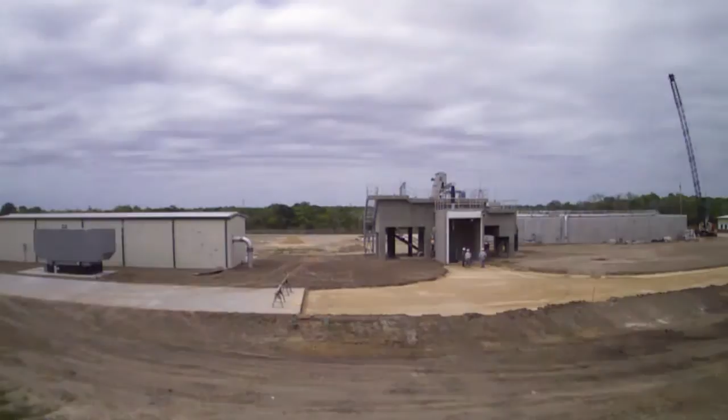Welcome everybody this morning to our grand opening of our Odem Street Wastewater Treatment Facility.

This morning really is a culmination of a 12-year planning process that began in December of 2004. At about that time, flows from heavy rainfall triggered some regulatory requirements to begin planning for a new wastewater treatment facility. We haven't been building the facility for 12 years, but we have been planning it. It takes a lot of time to figure out what you're going to build, where, and how much it's going to cost, then moving into getting that put into our capital improvement program, getting funding, going through the permitting phase with the state regulatory agency, and finally getting into design and construction.

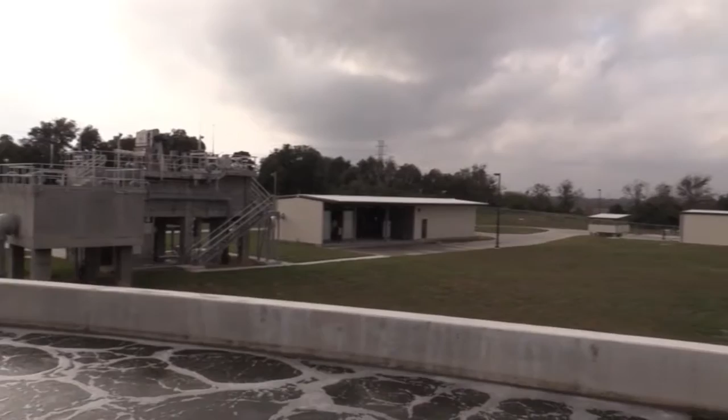It's been a very long time coming, but the result is this new state-of-the-art 4.4 million gallon per day treatment facility, which will serve the citizens of Victoria for many decades to come. In addition to adding new capacity to our system, this plant also replaces the old Willow Street wastewater treatment facility, which was a 1950s vintage trickling filter plant using very old antiquated technology. That has now been demolished - we're just finishing up the demo of that facility right now.

I want to take this opportunity to recognize and thank some of the contributors to making this day possible. Our Mayor Paul Polasek is here, Councilman Jeff Bauknight, Councilwoman Jan Scott, Councilman Rafael de la Garza, and Councilwoman Josephine Solis. Thank you very much for y'all's input into this. I'm going to ask the mayor to come up and say a few words, and then I have some other people after that I want to recognize. Mayor?

Thank you. I'm excited. And I'm not sure what that says though when you're excited about opening a wastewater treatment plant. I was joking with some of the engineers that I'm kind of an infrastructure geek, which I guess is rare, but to be on a municipal government, that helps, you know. Congratulations, Lynn, and all the department heads on getting this project done. That 12 or 14 years? 12 years. And you know, Mayor Armstrong, former Mayor Armstrong, was in the middle of all that, and there were a lot of votes and a lot of debate and a lot of discussion to get to this point. Most of it good, some of it a little controversial, but here we are today.

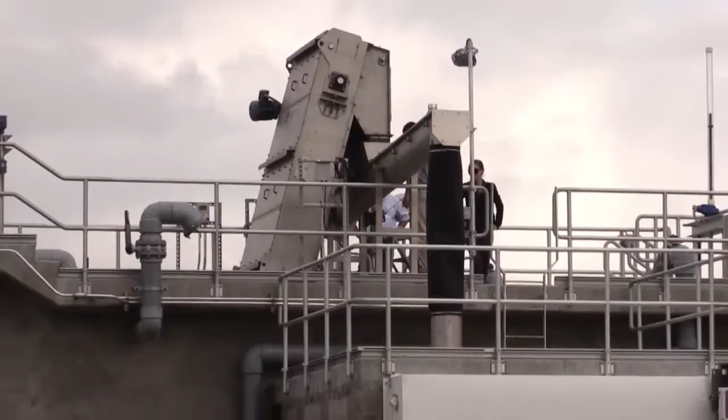We used odor control here because we want to be good neighbors to our citizens. Odor control in the form of chemical odor control at the lift station down on Southwest Ben Jordan. Here, we took some measures to control odor. We covered the headworks where most of the odor comes from. We installed odorous air blowers that exhaust the air from there and inject it underwater, used in the treatment process to prevent odors.

We used fine bubble diffusers so that we prevent off-gassing, or at least inhibit off-gassing. And then we used high-speed turbo blower technology here, because a big part of the cost of operating a sewer plant is generating air. So we wanted to be as energy efficient as possible. We used the latest technology in turbo blowers.

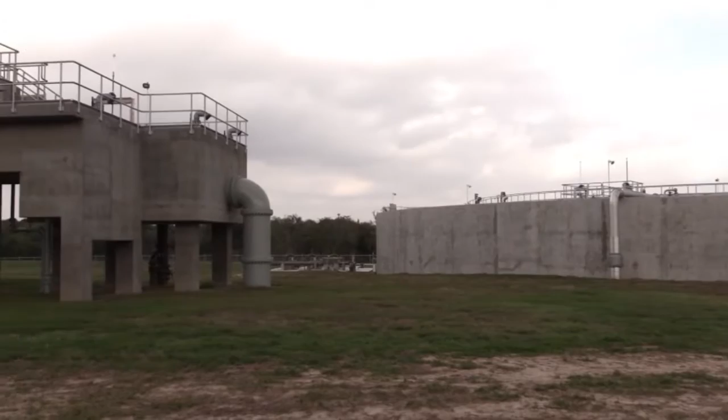We built an anoxic chamber in our aeration basin that you'll see when we're up there. Basically it allows for the proliferation of a good kind of bacteria that we want to make this process good.

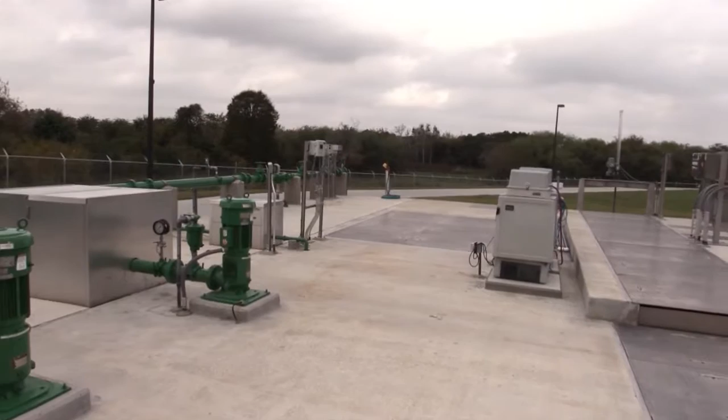We used ultraviolet disinfection because we use bacteria to consume waste in wastewater. At the end of the process, before we put it back in the river, we need to remove those bacteria. Most plants use chlorine for that. Chlorine is a toxic gas, susceptible to releases. Again, we wanted to be good neighbors, so we're not using chlorine. We are using ultraviolet light. It doesn't necessarily kill the bacteria, but it scrambles their DNA to where they can't reproduce, and then they die because they live a very short life cycle anyway.

And then finally, when you get up on top here in a minute, you'll see we use shared walls between these structures, which basically saves on concrete you got to pour, saves dollars. We were able to bring this plant online at about $3.60 per gallon of capacity, and that's pretty unusual. Most activated sludge plants today are costing around $5 a gallon of capacity. So we employed a lot of innovative technology and still made a very economical plant, we believe.

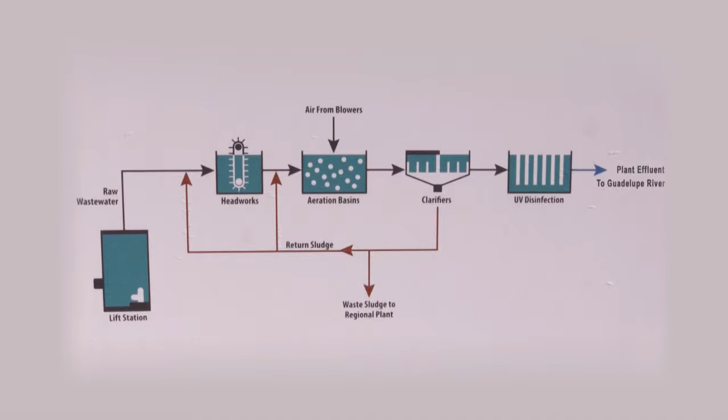I'll talk about the process real quick so that when you go upstairs you'll understand what you're looking at. This is a flow diagram of this plant. This uses the activated sludge process. Wastewater treatment is a biological process. It's not like water treatment, it's not a chemical process. It's biological. We rely on microorganisms to consume the waste from the water. So when we're talking about wastewater treatment plants, all we're doing is trying to design an environment that bacteria love. It really encourages them to grow and reproduce and eat and reproduce again.

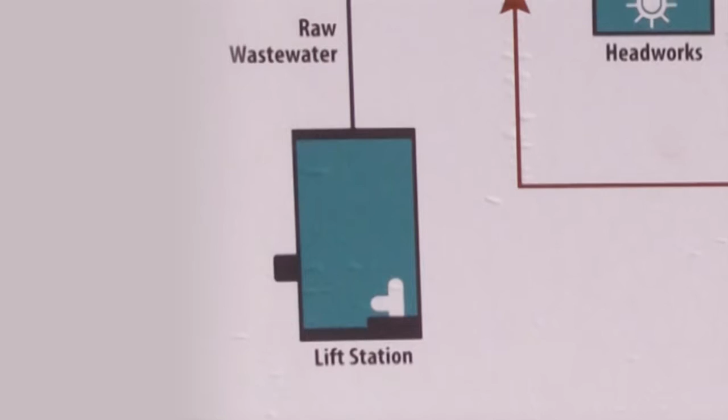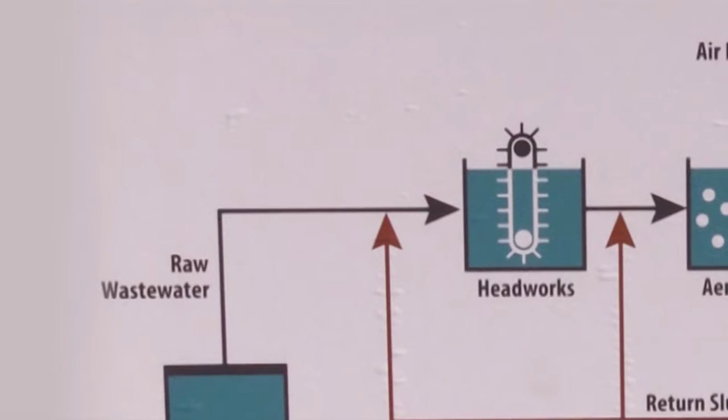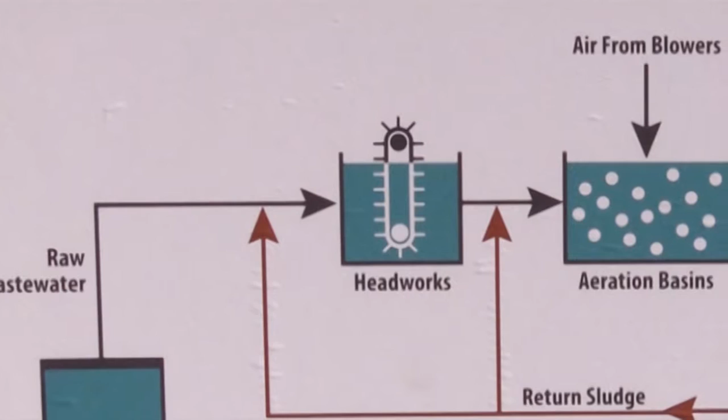So we start out down at Southwest Ben Jordan and Bottom Street with a lift station that takes raw wastewater from a large diameter main that runs down to the regional plant, and we pump some of that wastewater up to the plant. It first goes into a headworks structure which has a mechanical bar screen in it that cleans out solids from the water, things like everything from chewing gum wrappers to rags to anything else that gets into the sewer system, and a lot of solid material gets into the sewer system. We remove that and it goes into a dumpster, and periodically it's taken to the landfill.

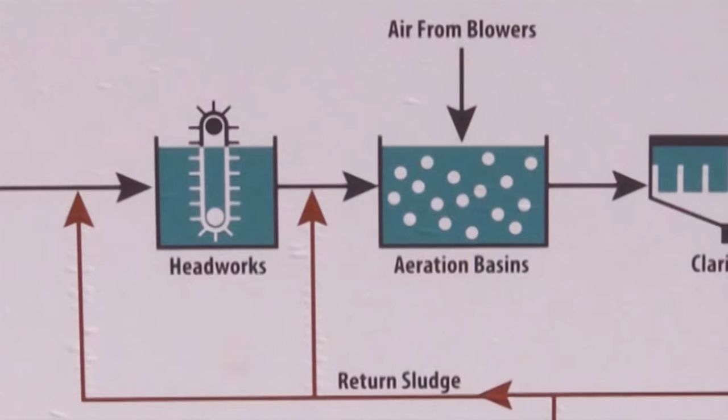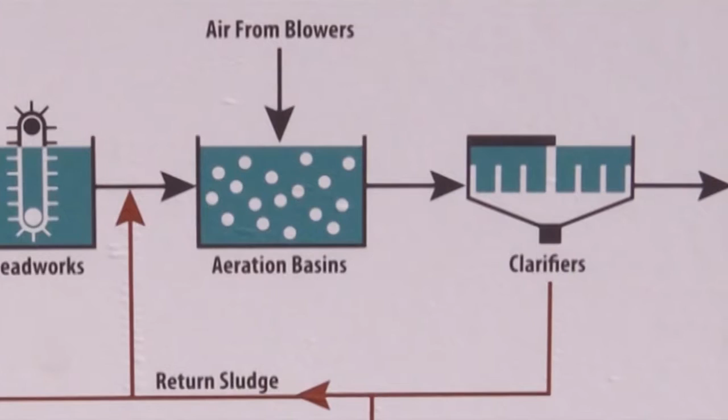From there the water goes into an aeration basin, and that's where the biological activity occurs. We use aerobic bacteria that need food, warmth, and air to do their thing, and their thing is eating and reproducing, and that's what we want them to do. So we bubble air in there. It's warm in South Texas, we don't have to worry too much about heat. We've got to keep a food source coming to them, and then they consume the waste.

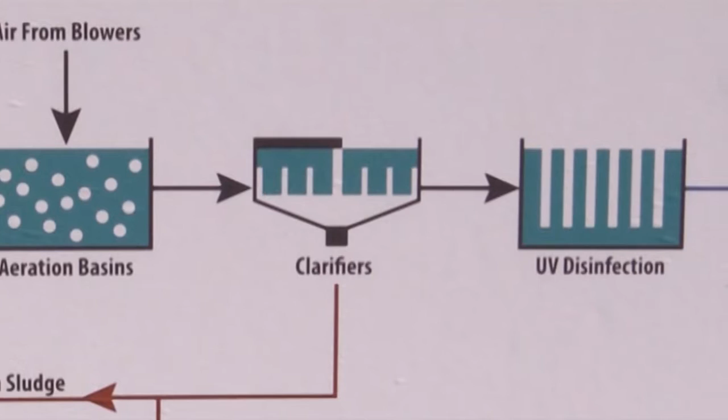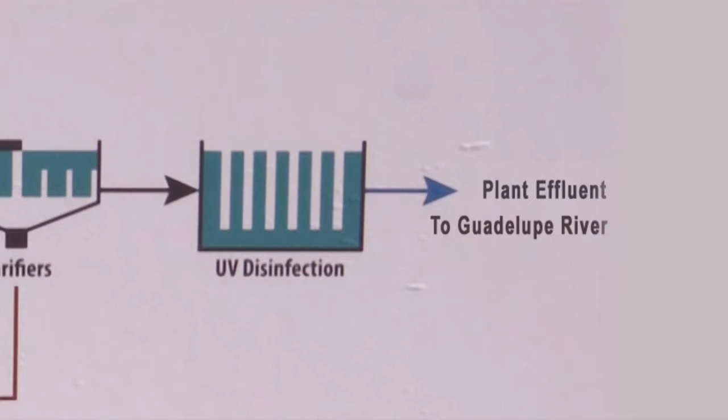From there, the wastewater goes into a clarifier, which is just a settling basin that allows any sludge to settle out. The clear water then goes into our UV disinfection, where we shine ultraviolet lights on the water, and as it passes by there, it scrambles the DNA of the bacteria that are left remaining. From there, the water goes back to the Guadalupe River at the same discharge point as our old Willow Street did.

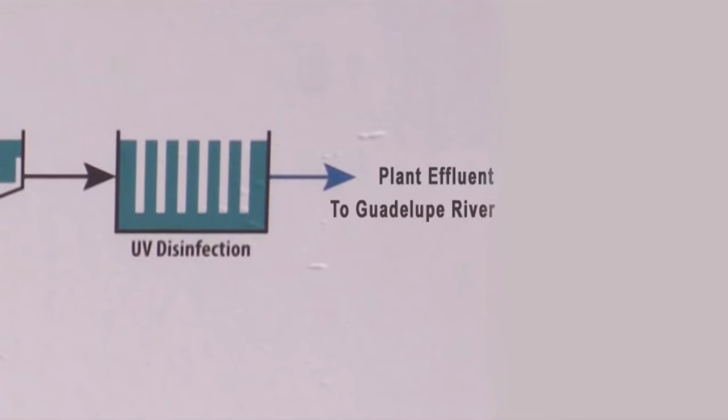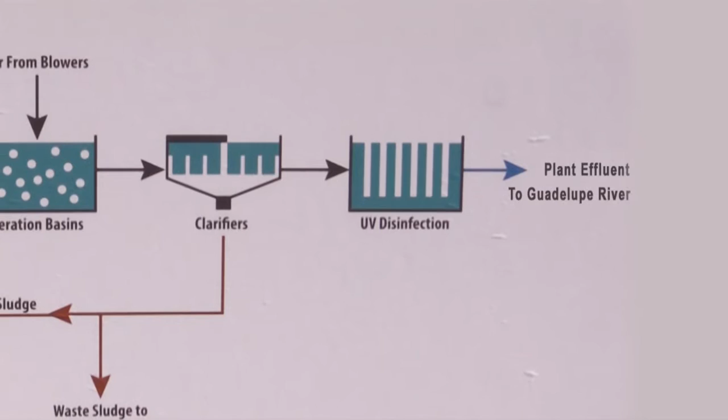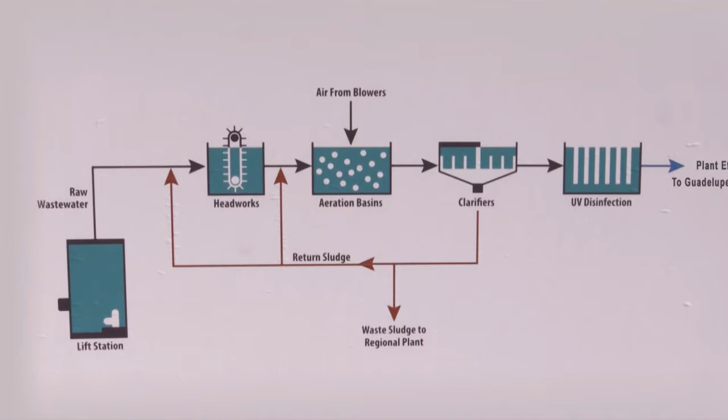The sludge off the bottom of this clarifier comes around here, and we pump some of it back into the headworks because we always want to be recycling bacteria so that we have a good, healthy set of bacteria in here to consume the waste. The additional sludge then is pumped through a pipeline down to the regional plant, where it is dewatered using a belt filter press, and then it's taken to our compost site, mixed with ground brush and vegetation, and made into a marketable product and sold.

So that's wastewater treatment. Okay, we've done plant overview. I think we're ready to cut a ribbon.

If I could ask the mayor and council to come up here and help me. Okay, I'm gonna count to 3 and cut. 1, 2, 3. All right.